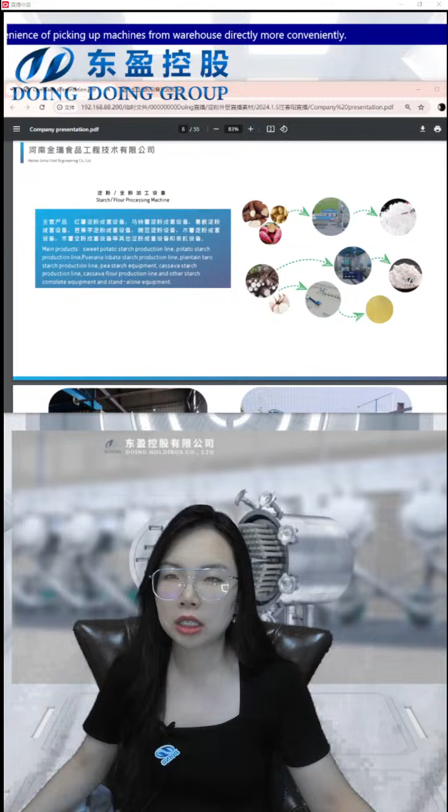And this is our company. We process all kinds of starch and flour processing machines, such as the sweet potato starch production line and the potato starch production line, and also plantain, pea starch, and cassava starch. We turn these things into all kinds of powder to meet the different needs according to the market.

And these pictures show projects in different places. This picture shows the project we did in Tanzania. It's a cassava flour project, and this picture shows our first warehouse in Nigeria. And this picture shows our company, our factory.

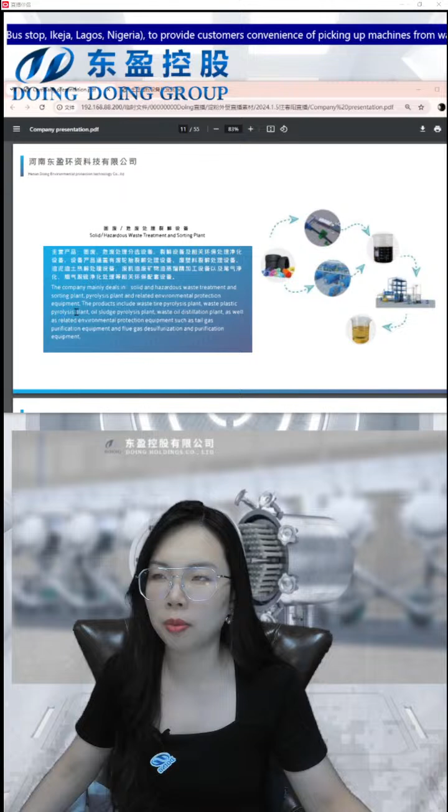And just now I said we still have another business segment. This company is also a subsidiary of our Doing Holdings. It's Henan Doing Environmental Protection Technology. This company mainly deals with solid waste treatment and the oil plant, also the pyrolysis plant and related environmental protection equipment. We turn the waste into diesel, into all kinds of oil, to do environmental protection.

And we also have the metal and plastic separating machine to separate the metal and plastic from the waste tire.

Okay, there are some certificates, because our machines usually have to be exported to other countries. Many machines go to Europe, so we have the ISO certificate, and we also have national patents to help meet international standards.

And then these are some of our factory's manufacturing equipment. This is a laser cutting machine, and this is a CNC plasma cutting machine to cut the heavy stainless steel raw materials. And this is a steel plate bending machine. These machines are all in our factory because we are the manufacturer ourselves, so we have to have the ability to manufacture the machines by ourselves.

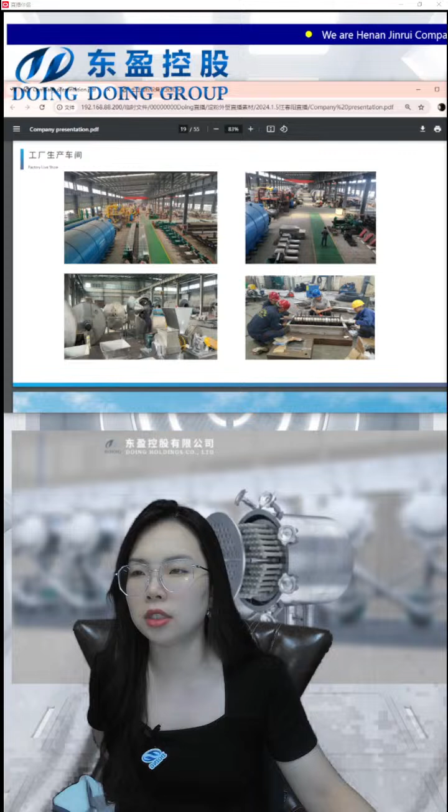And this is an automatic submerged arc welding machine. Many machines in our factory. And you can see these are some pictures of our factory. The workers, these are our environmental factory, and these are the machines for all kinds of starch, and this one shows the cutting machine here.

Okay, and then the next part will be the team show. Firstly, our founder and chairman, Mr. Zhong, former key account manager of the Midwest region of Alibaba Group. Alibaba, do you know Alibaba? It's very famous over the world. He led the team to establish Henan Doing Mechanical Equipment Co., Ltd. And at present, the equipment has sold well in more than 80 countries and regions worldwide.

And this is our international trading team. This picture shows our team, the international trading team.

This picture shows the engineer abroad, because we also have many engineers. They have to install the machines all over the world, and they have to solve the after-sale problems.

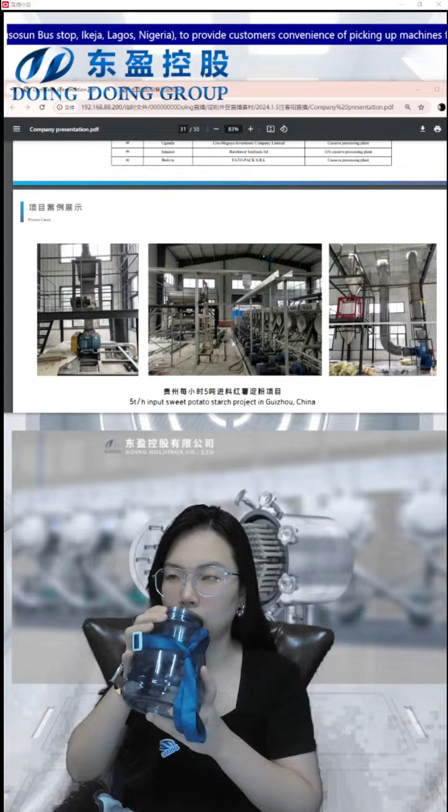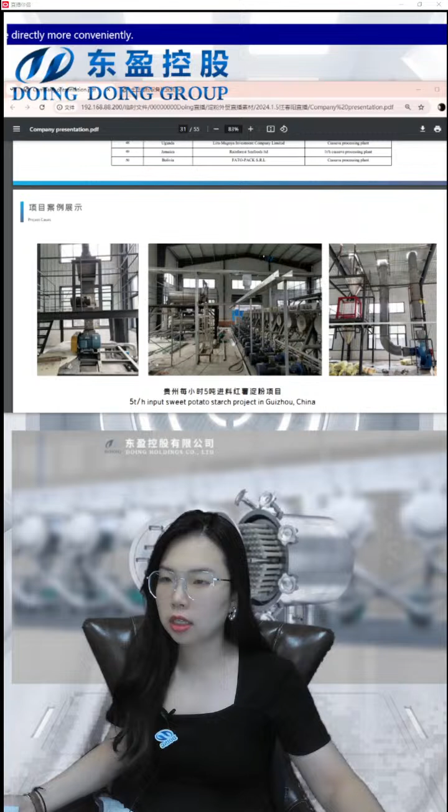And then let me show you some project cases. Firstly, this one is a 5 tons input sweet potato starch project in Guizhou, China. And this one is the cutting machine, the rasper machine, the hydraulic press, the hydrocyclone station, and the flash drying system.

This one shows the 35 tons input per hour potato starch project in China. This is a centrifugal sieve. And these are some tanks.

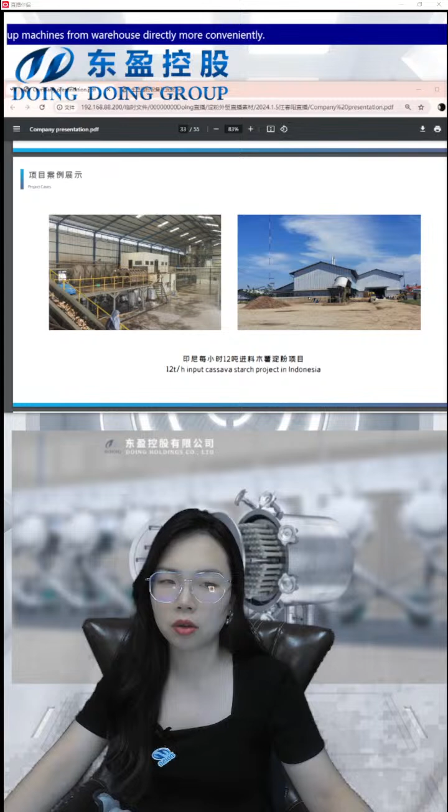Okay. And this project is a 12 tons input cassava starch project in Indonesia. This company is so big, and they are still manufacturing now. We did this 5 to 6 years ago, and now the company is still working, manufacturing cassava starch.

And this one is a 20 tons input cassava starch project in Nigeria. These are pictures of the installation. This one is a peeler for dewatering the cassava slurry into starch slurry.

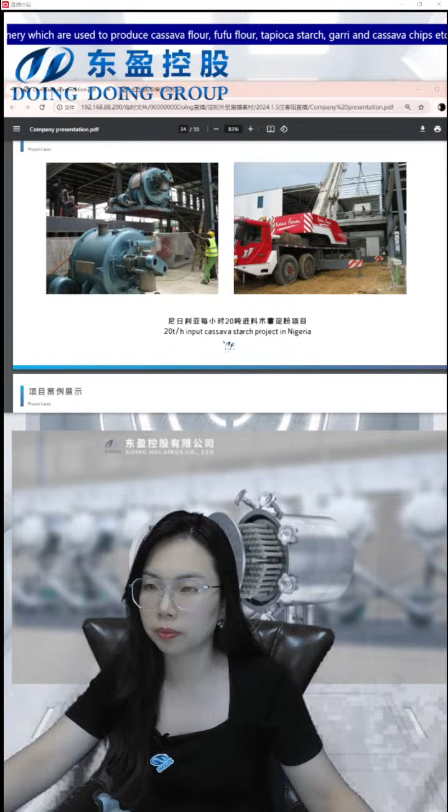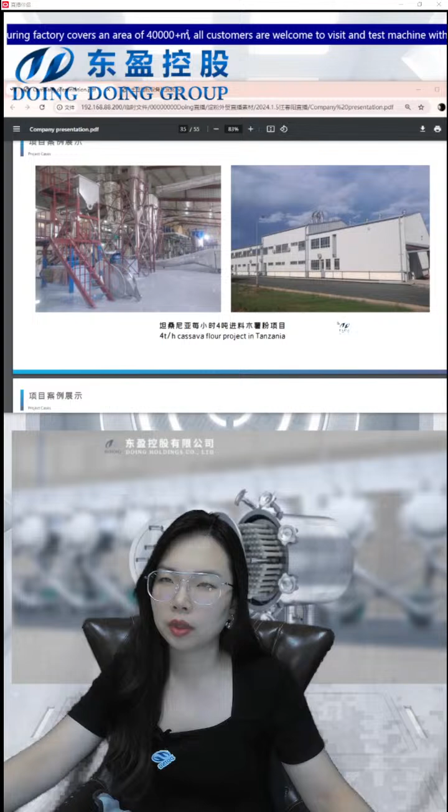Okay. And this one is a 4 tons input per hour cassava flour project in Tanzania. This factory also works. We did this 3 years ago, and now their factory is still very beautiful.

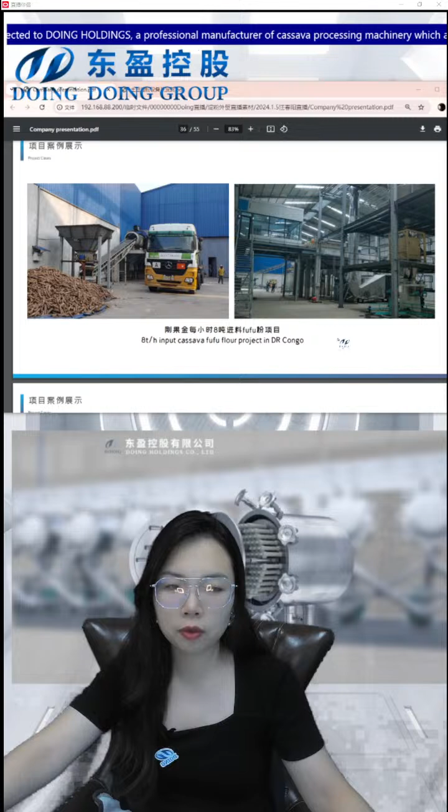This one shows the 8 tons input per hour cassava fufu flour project in Congo. You know, some cassava has bitterness, so the people in Africa usually do some fermentation to remove the bitter flavor from the raw material. So they have another kind of flour named fufu flour. It has some sour flavor, and this kind of flour can also be used for baking, making spaghetti, and making bread.

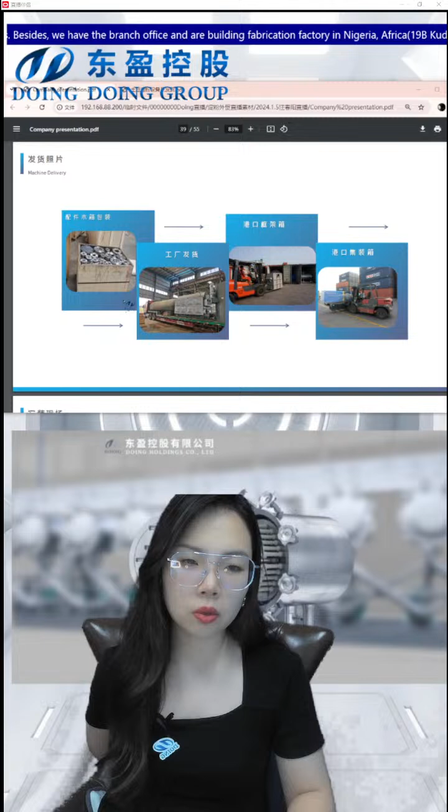This shows the pictures of the machine delivery. You know, before delivery, we separate the attachments and the main machine, and when the container comes to our company, we set a camera there to record the whole loading procedure. The video will be sent to you so you can see what we are doing, whether the machine is okay, and how we place it in the container.

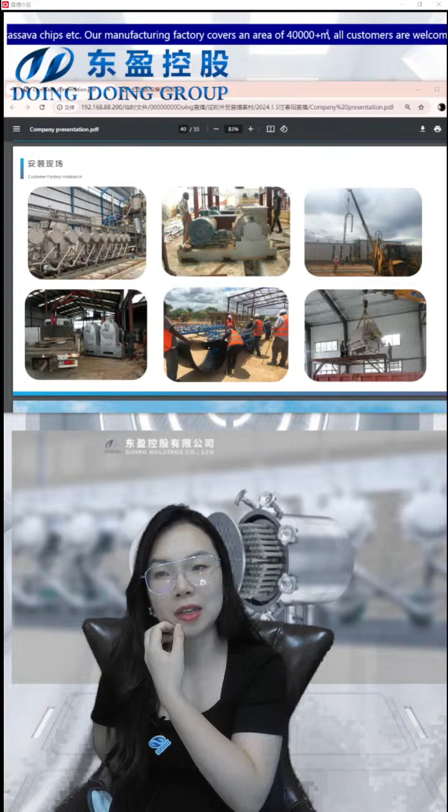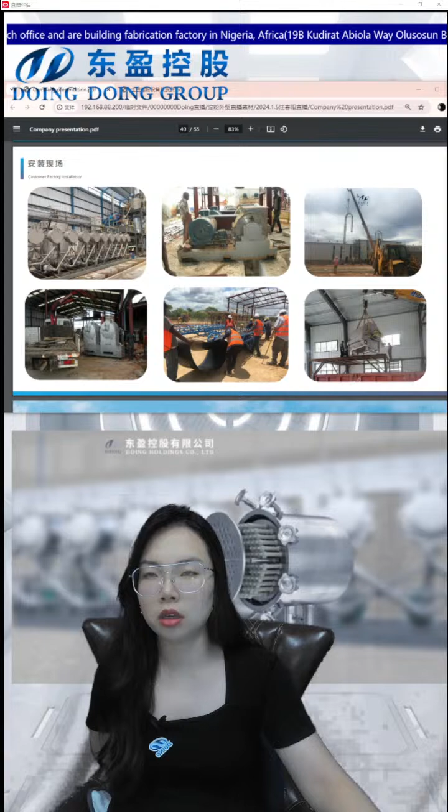And these are the customer factory installations. The picture shows the installation of the belt conveyor, and these are the rasper machine, and this is the hydraulic press. The picture shows how to install the flash drying system. Okay. Later, let's first check the video of the potato starch, and we continue with some introduction of the potato starch.

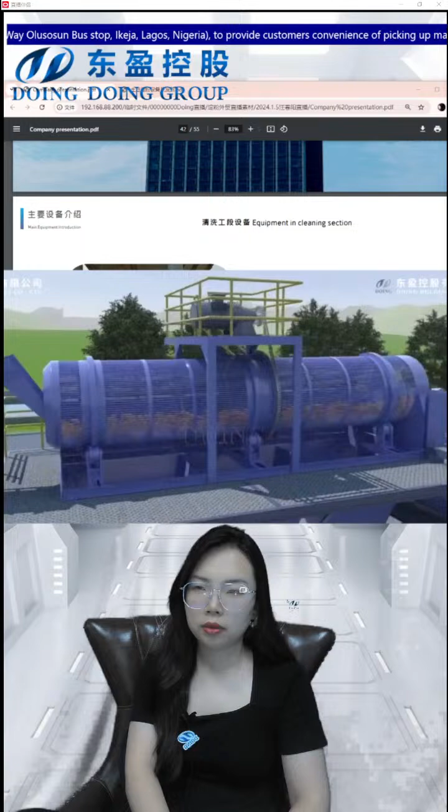Okay, firstly, please just watch this video and see how the machine goes and how the processing line works to help you get the potato starch.

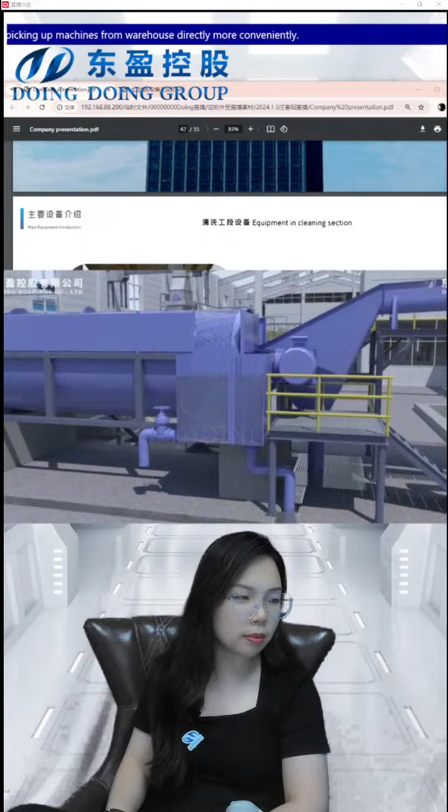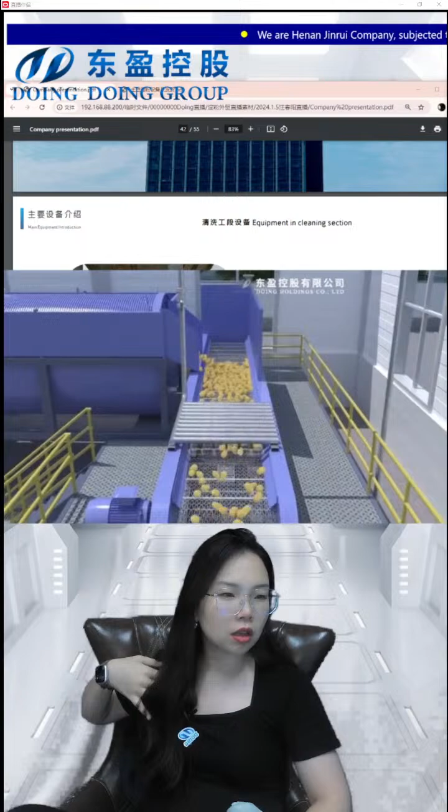Yes, hi. I know you're from India. Are you my customer? I sent the picture to you today, because I have some Indian customers, and they want to do potato starch these days. They have much interest in potato starch.

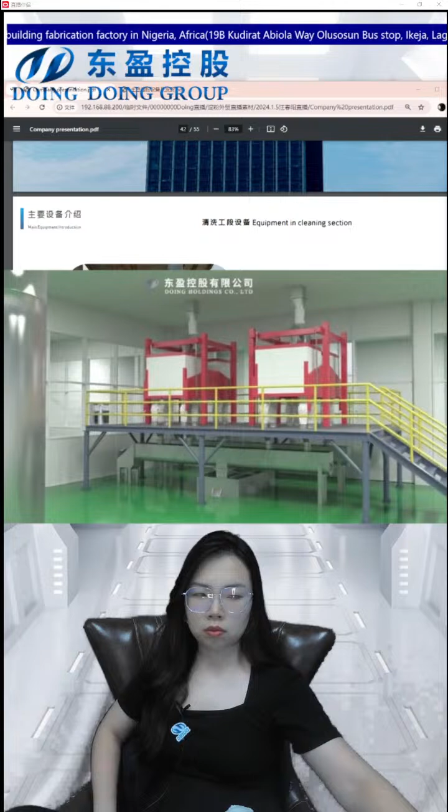Okay. Let's talk from the first machine to the last machine. Firstly, according to this video, we found that in fact this is the factory design in China. So in China, we have to do the water treatment. So we have some equipment for treatment of the water, the wastewater, the clean water pool, soft water pool, and soft water factory, and other equipment, other pools to treat the wastewater.

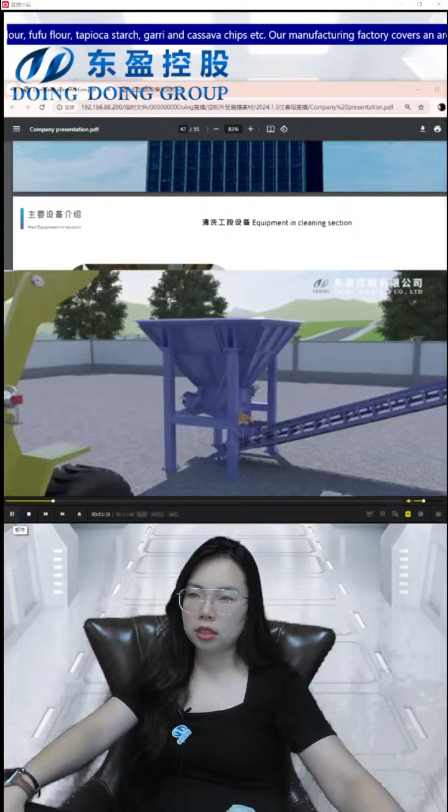Okay, and then we will see some machines for the workshop. Firstly, we have to move the fresh potato to the feeding hopper. This one is called the feeding hopper. And at the bottom of the feeding hopper, there is a vibration device that can push the cassava gradually, push the sweet potato gradually to the belt conveyor, and this one is the belt conveyor.

The belt conveyor will transport the fresh potato to the next stage. This one is called the dry sieve machine. The dry sieve machine is to remove the impurities from the potato, and the impurities will be gathered at this place, at the bottom of this dry sieving machine. And after the dry sieve, after the pre-treatment of the sweet potato, we need to wash the potato to make it clean.

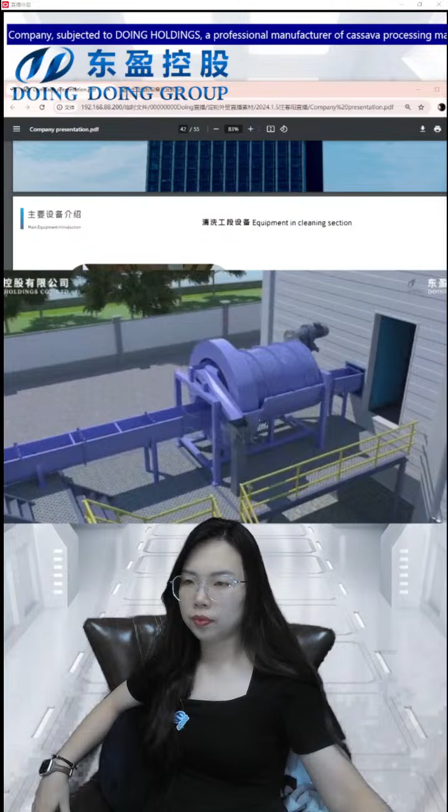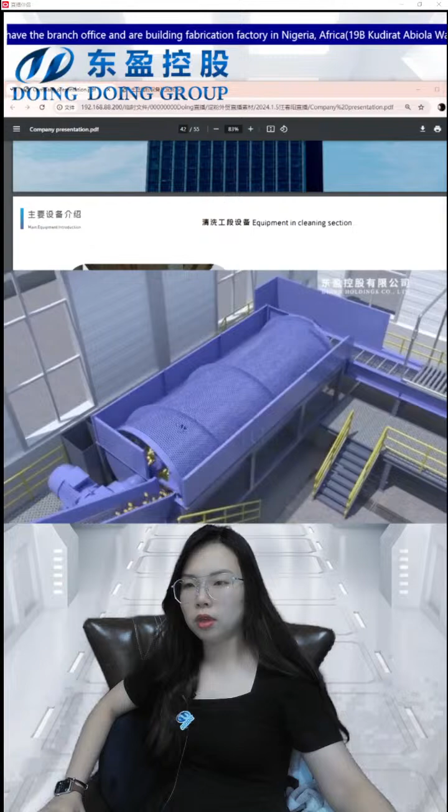And this one is another kind of machine to remove the stones, the big stones, from this place to this place, from input to output. And after removing the big stones or some small stones, we move to another kind of machine for washing. This machine is called the rotary washing machine. Rotary washing machine, because you know the potato is easy to get broken. So we use this machine to help the potato not get broken.

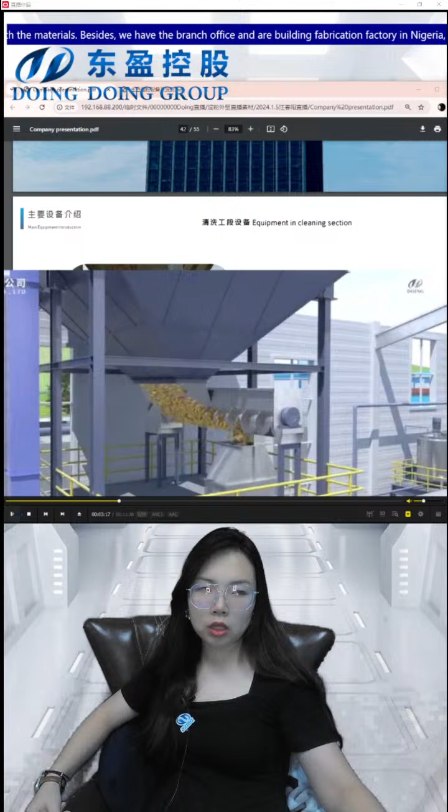And then there is a lifter to lift the potato to the next station. Then we have to process them. To process them, we need two machines. In order to get the starch, we advise you to firstly cut the potato into some particles, into some cakes, and then we use the rasper machine to get more starch out. This one is called the cutting machine. And after that, the screw conveyor will transport the cut potato to the next station. It's called the rasper machine. The rasper machine helps us to get more starch out from the raw material.

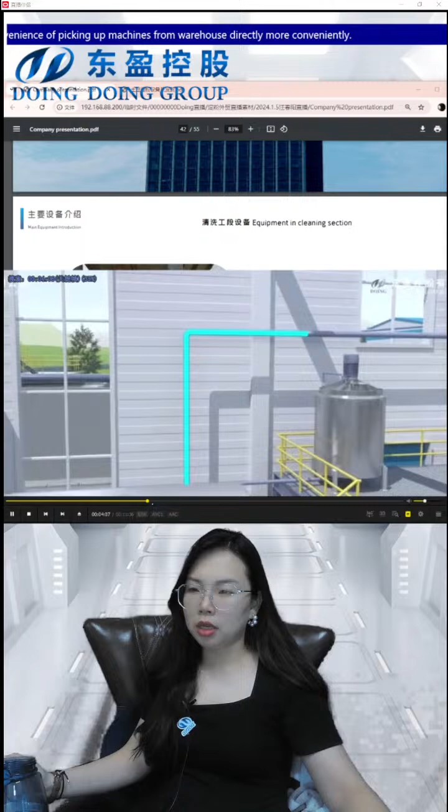And this place is a slurry pool. We gather the slurry, and then the next station is to separate the fibers, the big fibers, and the slurry. We use this machine called the centrifuge sieving machine. Centrifuge sieve. And let me tell you how it works. You know, in the slurry, for now, there are three things. Firstly is starch slurry, and then some big fibers, the potato fibers. These machines help us to separate the fibers and the cassava slurry.

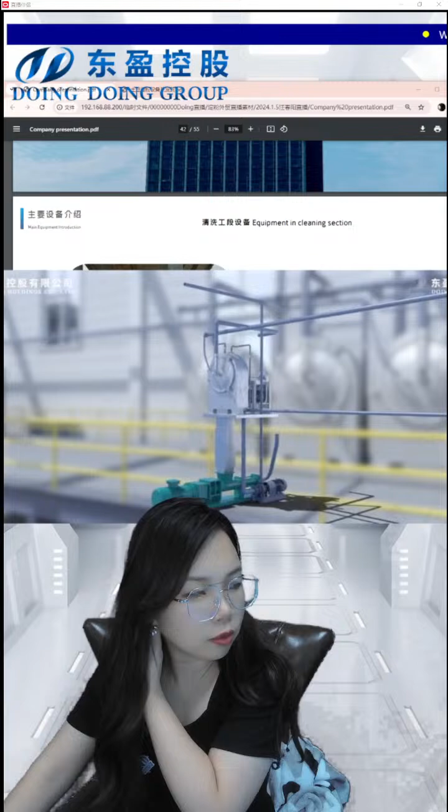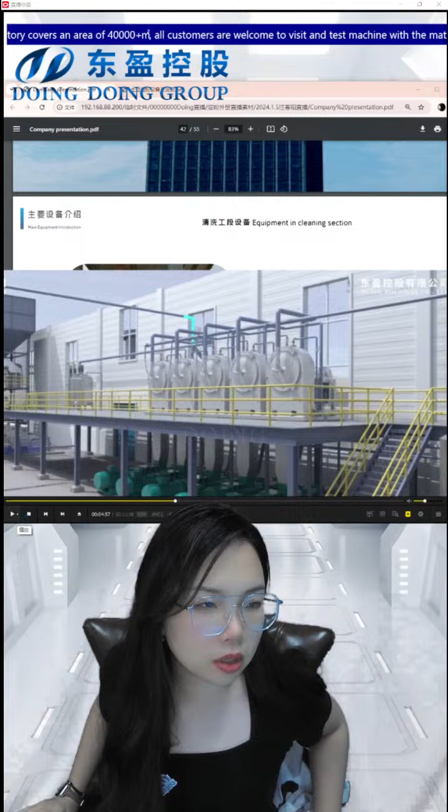The impurities will be removed by the centrifuge. The fibers will come out at this place, and the cassava slurry, the potato slurry, will move to the next station. And the reason why we set up 1, 2, 3, 4, 5 stages of the centrifuge sieve is that we want to reduce the losses. Because you know, in the fibers there is still potato starch remaining. So we use 1, 2, 3, 4, 5 stage centrifuge sieves to help us get more starch from the potato.

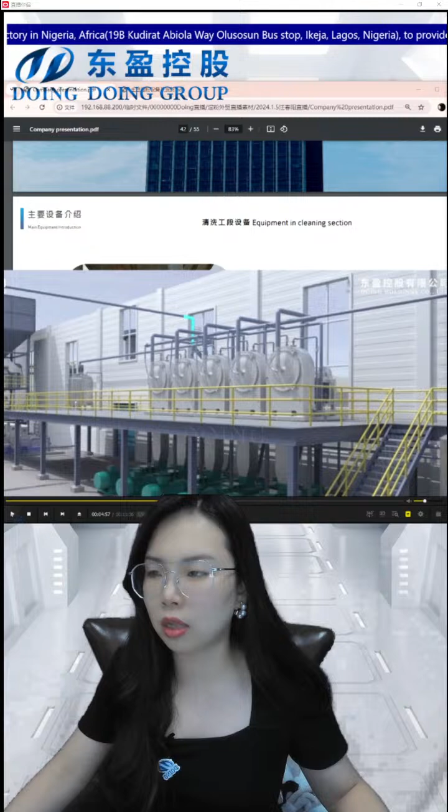And then we move to the next station. The next station is this machine called the desander. The desander is to remove the fine sand, the fine stone, very fine sand from the slurry, because the fine sand will affect the whiteness of the finished product, and the whiteness will influence the final price. This one is a desander.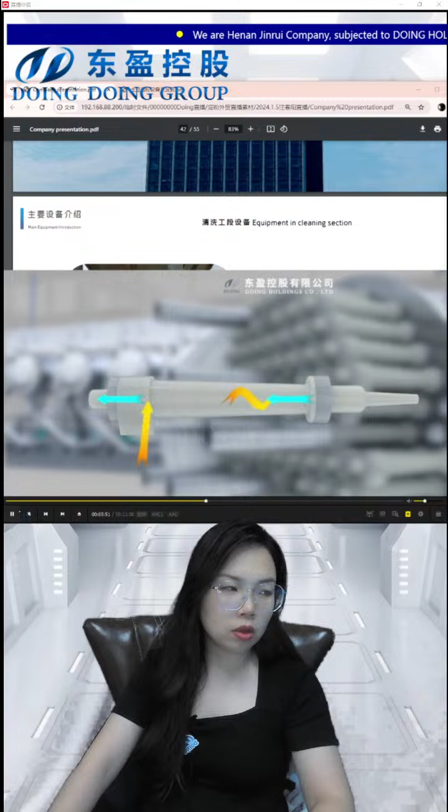And the next station is the most important station in processing all kinds of starch. It's called the hydrocyclone station. It is combined with 16 stages to 18 stages. And you can consider it as a huge settling pool, because in the traditional way, if we want to get the starch, we use the settling pool. So you can just take it as a huge settling pool.

And this machine also uses centrifugal gravity to remove the water. The water is lighter than the starch, so the water will be removed at the top of this machine, and the starch will be delivered into the next stage at the bottom, because it's heavier. And for the same reason, we use 16 stages to 18 stages because we want to reduce the losses from the starch slurry.

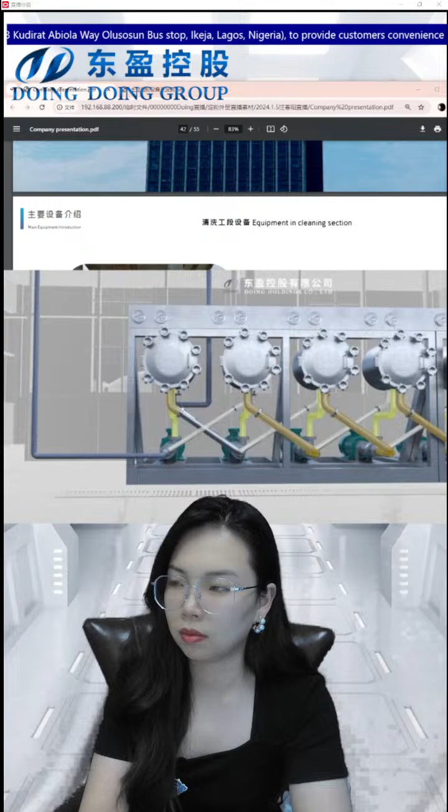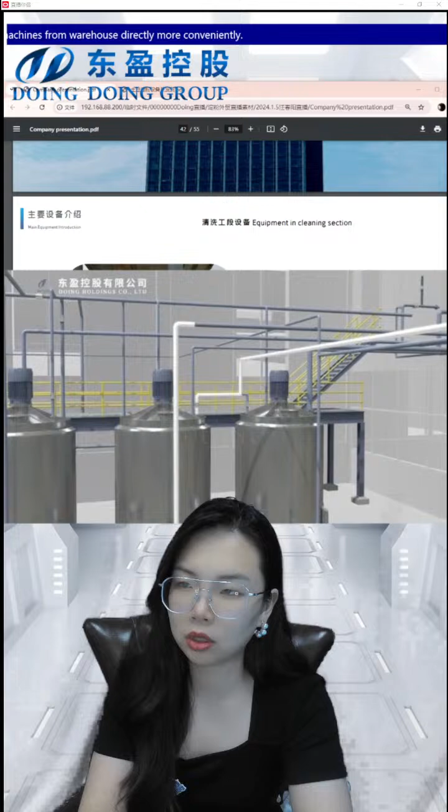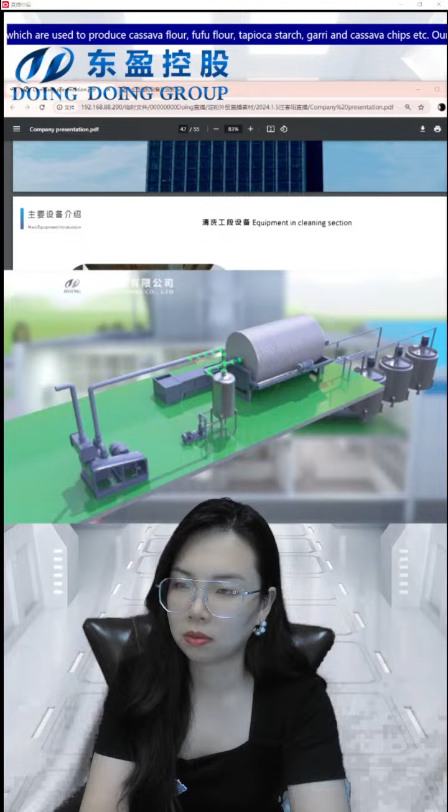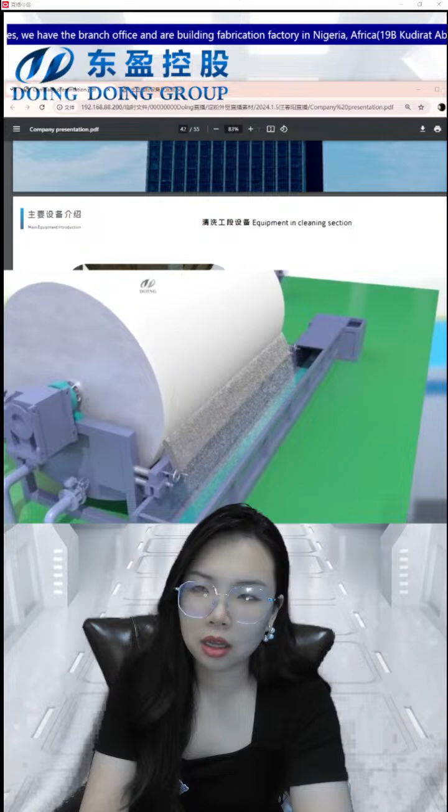And after the refining, we will move to the next station. The next stage is dewatering. At the dewatering stage, we use a vacuum filter, a vacuum dewatering machine. It's a fully automatic dewatering machine.

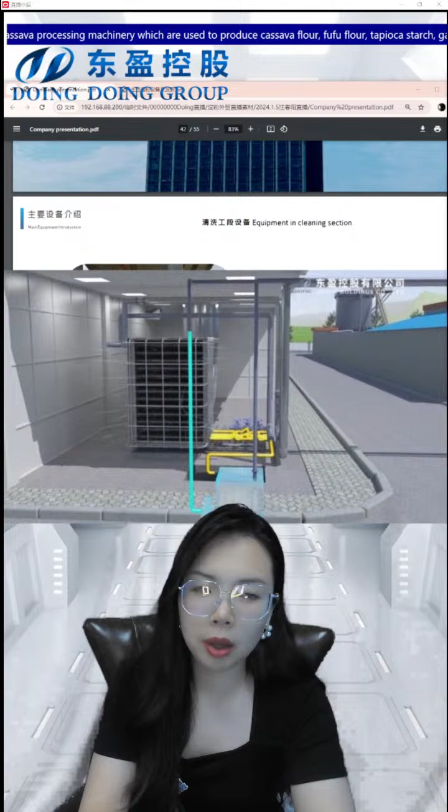And after the dewatering, the next stage is drying the potato starch, and we will use a flash drying system. The powder and the heat will exchange. The hot wind will exchange in the pipes. So, depending on the heat exchange, the moisture content of the powder will be reduced to the international standard.

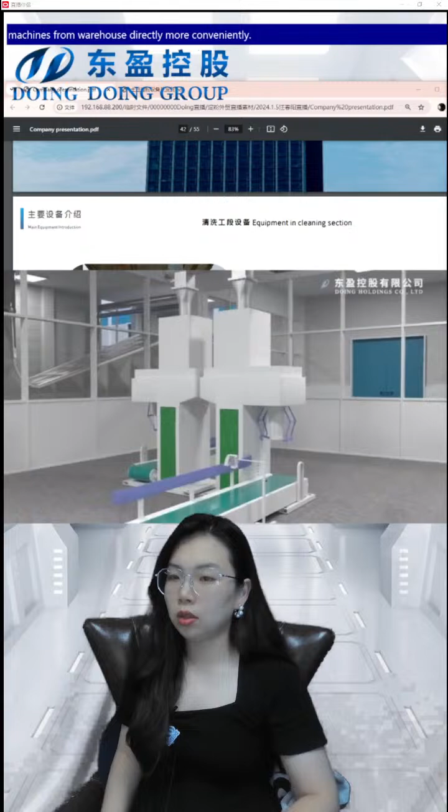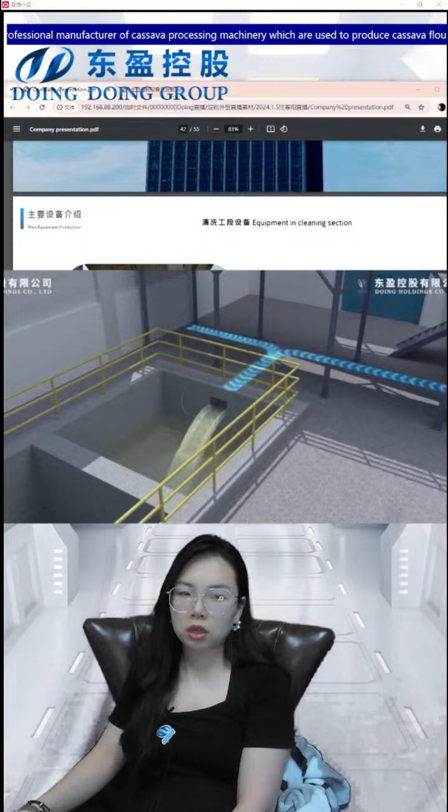And this shows the wastewater pool. You know that some wastewater can be used at the cleaning stage. We use the wastewater back to clean the potato. And these are the equipment for the water treatment, wastewater treatment. Wastewater.

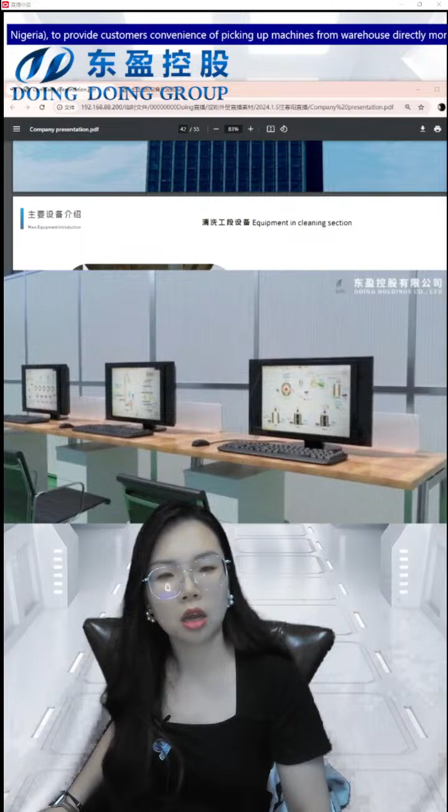And after treatment, the wastewater will go back to the cleaning stage to do some recycling. Okay. These are the electricity controls for the automatic starch processing line. We need the electricity cabinet and also the PLC, the automatic program, and also some monitors to see whether the factory is working or not. Okay.

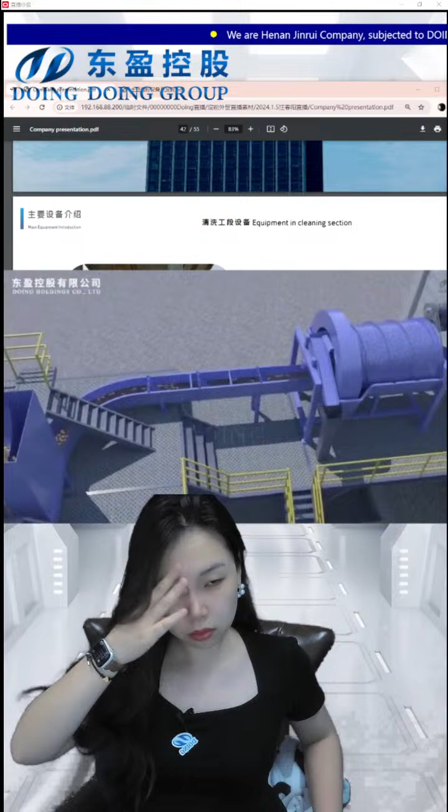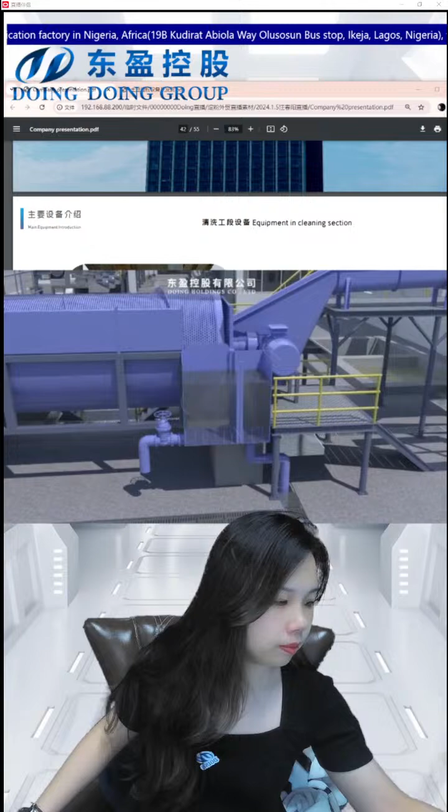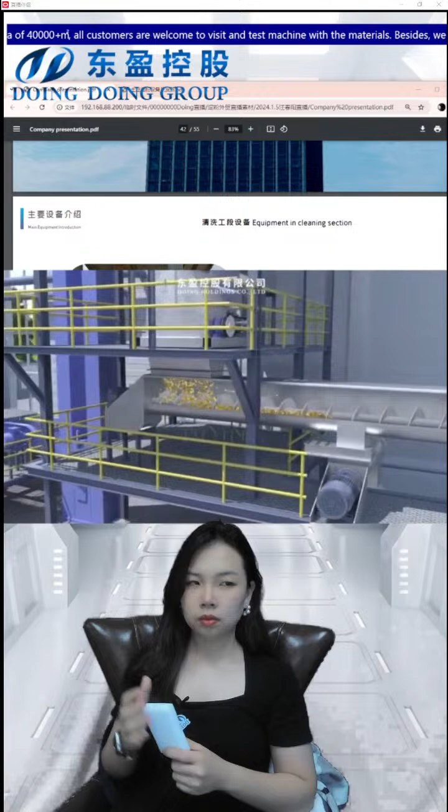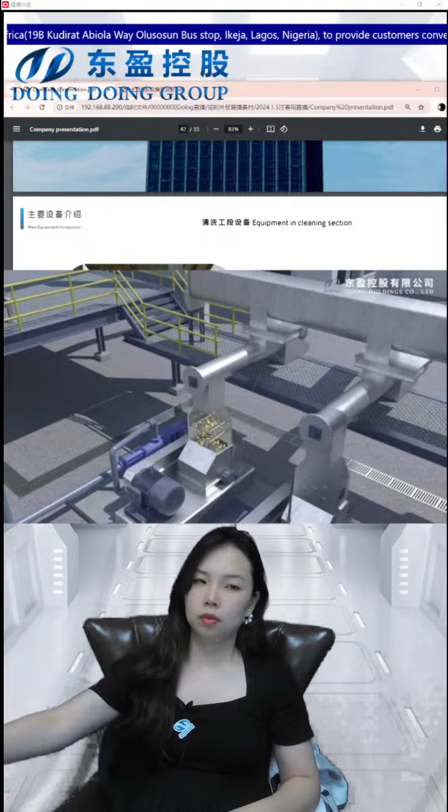Is there anyone in my live room? Only me or anyone else? Okay, if there is no one, after we watch the video, we'll finish today's live show. If there is no one in my live room, we will finish in 5 minutes. If there is no one in my live room, we'll finish the live show 4 minutes later. Is there anyone in my live room? Nobody in my live room. Okay, the live show will be finished in 3 minutes.

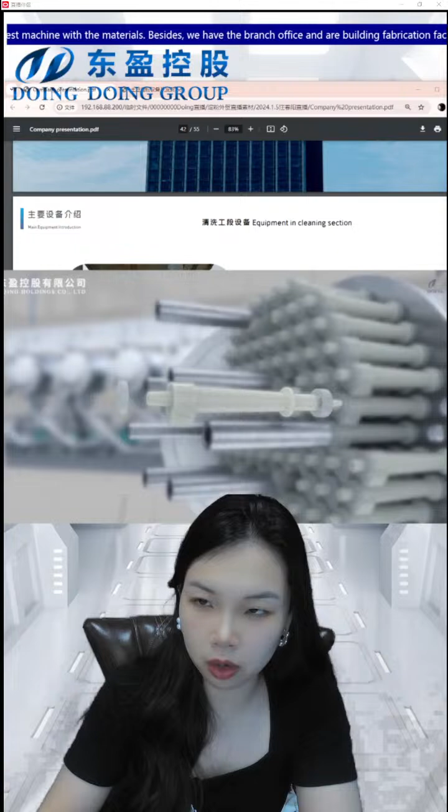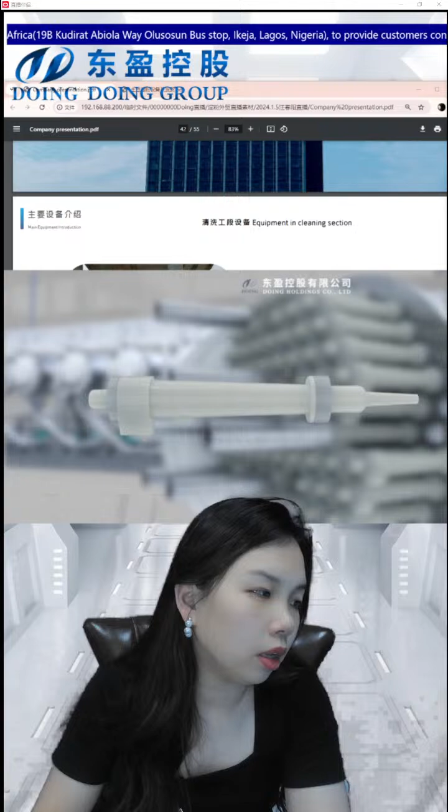We are a company providing professional tuber processing lines, such as gari, plantain, yam, cassava, potato, and sweet potato. We are a very professional tuber processing line supplier, because we did many projects all over the world, in Africa, in China. And we also have our own factory. We are not just a trader. We have our own factory here.